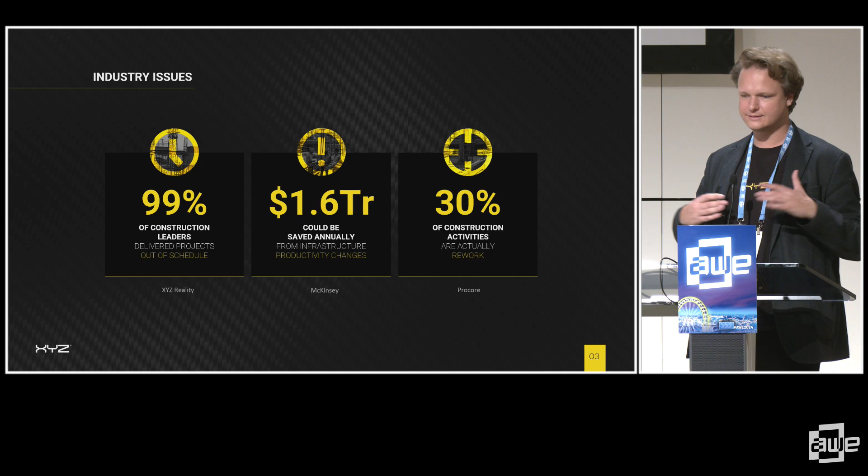All right, let's talk about construction. It's a multi-trillion-dollar industry with multi-trillion-dollar problems. Unfortunately, it's just an unfortunate fact of life that mistakes happen, and pretty much every project, from the airport that I flew here from to my grandmother's loft extension, inevitably runs into problems, goes over budget, and falls behind schedule. This is kind of just a law of nature, or so it was until today.

And why does this happen? Well, one of the main reasons is that 30% of the work that is done on a construction site is in fact rework—that's fixing mistakes that have been made. So 30% of all the activity is just fixing mistakes.

Our founder and CEO, David Mitchell, has been in construction his whole life, and he's seen a lot of these problems firsthand. In 2017, he founded XYZ after learning about AR technologies, and he realized that it could be the killer use case.

By law in Europe, all large-scale construction projects are designed according to BIM standards—that's building information modeling. What does this mean? It means you have to have a very detailed and high-accuracy model during the planning stage. However, when it comes to translating this out onto the building site, quite often the plan kind of goes out the window, and there are things people hadn't accounted for.

And so that is one of the biggest problems as far as we've identified. By showing people holograms of what they're building, positioned within construction tolerances, the industry could finally be able to build things right the first time and on time.

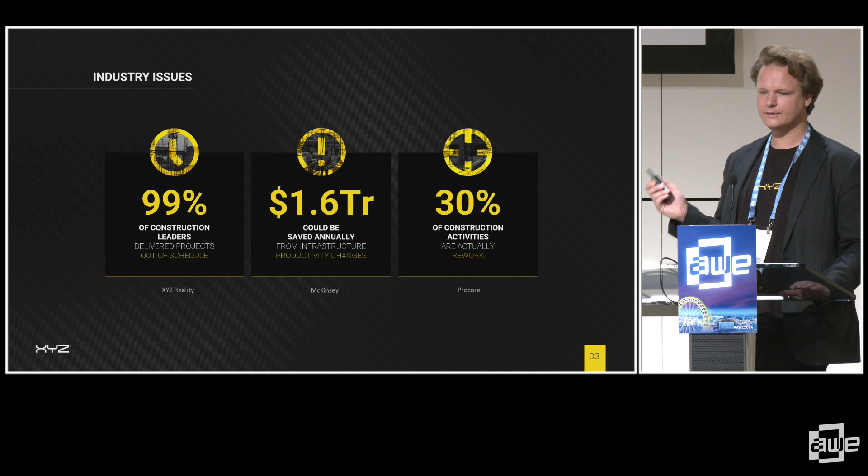So back in the early days of XYZ, we tested out all the existing solutions that were out there, and we found that they just weren't up to the job for what we wanted to do. Construction models can be really big—some of the data centers we've worked on are over 1 kilometer long. They've got hundreds of thousands of elements, hundreds of millions of polygons to be rendered. They're just huge. The existing products out there weren't even able to store this data on disk, let alone render it in real time.

And you might be asking, why don't we just use render streaming to stream it from somewhere else? Unfortunately, on a lot of construction sites, you don't have Wi-Fi, and you don't even have 5G if it's in a remote area. And if it's indoors, that rules out things like Starlink a lot of the time. So we had to design something that can run offline. The workflow being: you go in the office at the start of the day, you sync all the data for the day, you go to site, do your work, and it's all offline.

Then at the end of the day, you sync it back to the cloud again. So that's our workflow there, and we found that our devices weren't powerful enough. Also, they weren't accurate enough. You would find that if you walk around in a circle and come back to exactly where you started from, the system's tracking technology will have drifted a little bit. You have an accumulative drift that can build up over time with a lot of these tracking technologies. Construction typically permits a sub 10 millimeter tolerance for errors, and there was no device out there able to meet this standard.

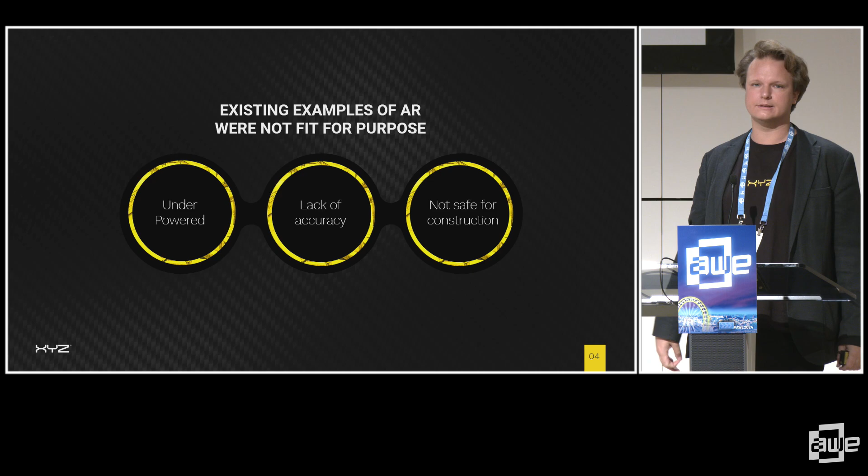And finally, there were really strict rules as to what you can bring onto a construction site. So if anything you're wearing on your face, you need to have unobstructed peripheral vision to be able to see any kind of threats and obstacles coming in from the sides. Anything that's covering your eyes has to have an optical clarity index test. So that rules out pass-through devices like the Vision Pro.

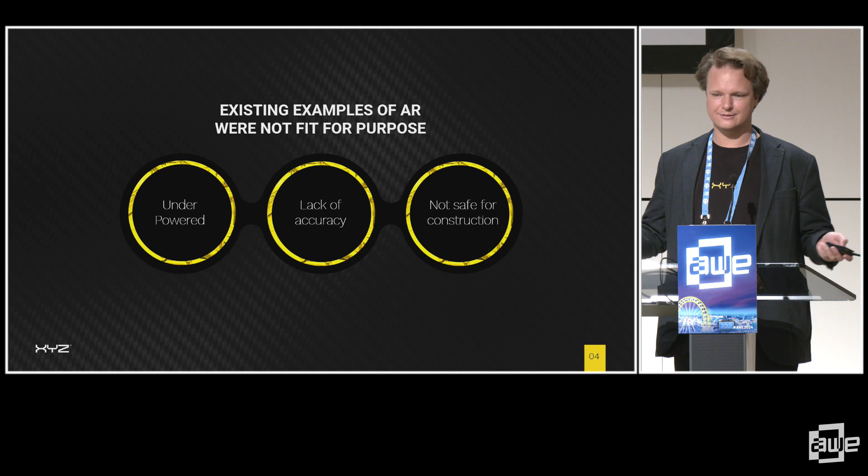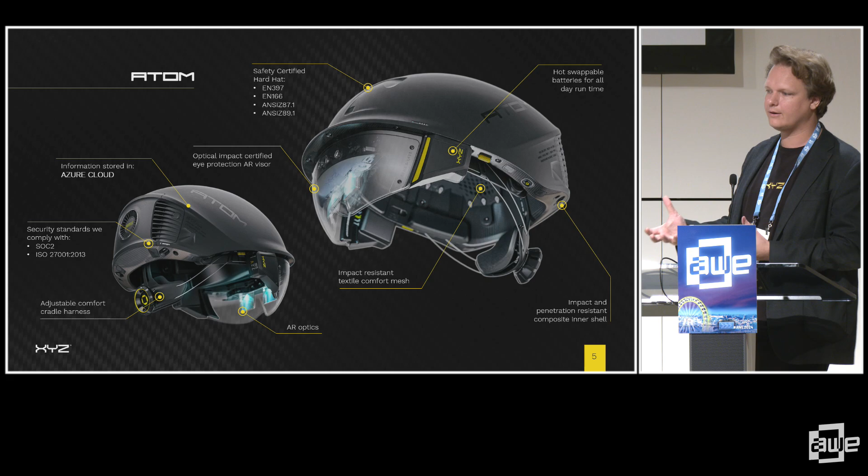There's a bunch of reasons why we had to do what I'm going to show you next. We realized that we were going to have to do it the hard way, and we built the Atom right here. So this is the only AR headset that's been purpose-built specifically for construction. It's a fully safety certified hard hat. It's got an Intel i7, 32 gigs of RAM, and a terabyte of SSD storage, so it's effectively like a reasonably powerful laptop that's all been reconstituted into the form factor of a hat.

It's also got hot swappable batteries so that you can have uninterrupted power throughout the day. And it's got a set of cameras on it. It's got some tracking cameras. It's got a laser tracking system. And it's also got an RGB camera so that you can capture composites of holograms and reality.

So it's not just the Atom. We've also built our own file format and exporters for various things like Revit and Navisworks. So once you've done your modeling, you can just drag and drop the model into our web platform, and we'll convert it into our .xyz format and sync it onto your device. This is a file format that's been designed to efficiently store and transmit BIM models and then be able to load them really efficiently into the GPU for real-time rendering.

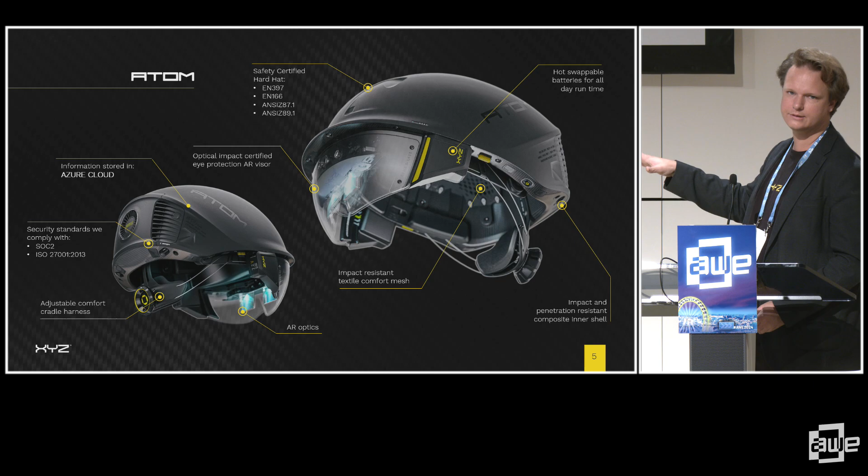It also comes with a controller. So why do we use a controller? I know that hand tracking is really in vogue at the moment. There's a couple of reasons. Often on a construction site, people are wearing gloves, and they can be really thick, and a lot of the hand tracking models that we looked at have not been fine-tuned for working with gloves. So that's a big problem.

Another one is that often on a site, people are going to be communicating to each other with hand gestures, and we don't want them to get misconstrued with people interacting with the technology. So we built this controller. It uses the same millimeter accurate tracking system as the hard hat, and it has a really fine steel tip on the end of it, so we can track the pointer tip down to millimeter accuracy.

And we can use that to sample points around the site, and this has a number of uses. We've got a tape measure tool, so you can measure from point to point. It's the only tape measure I've seen that can actually measure through solid objects because it's effectively measuring in air. And you can also use it to sample points around the site and align your models.

So what you're seeing the engineer doing in this image is he's using the controller to sample the position of a survey point. These survey points get put down by surveyors. They put thousands of them across a building site, typically. And each of these points represents a 3D coordinate relative to the site's coordinate system, relative to the models. So what you can do with the Atom and the controller, you can go around and tag any 3 points, and use that to align the models to the environment with really high accuracy. We offer some other methods as well.

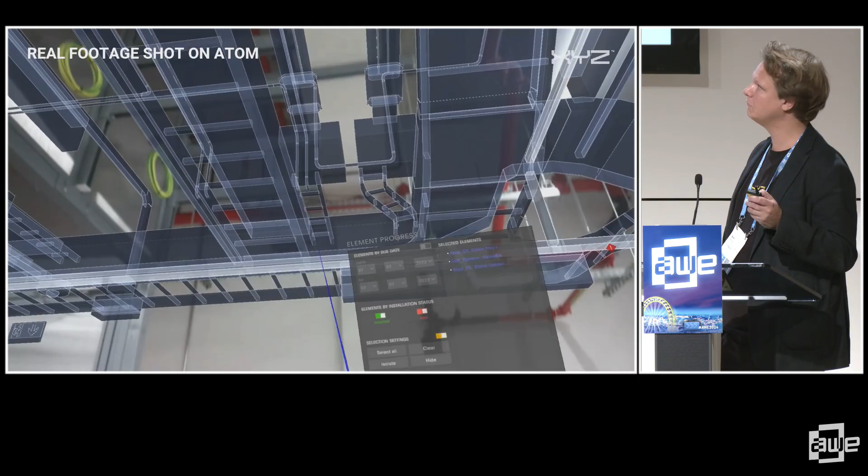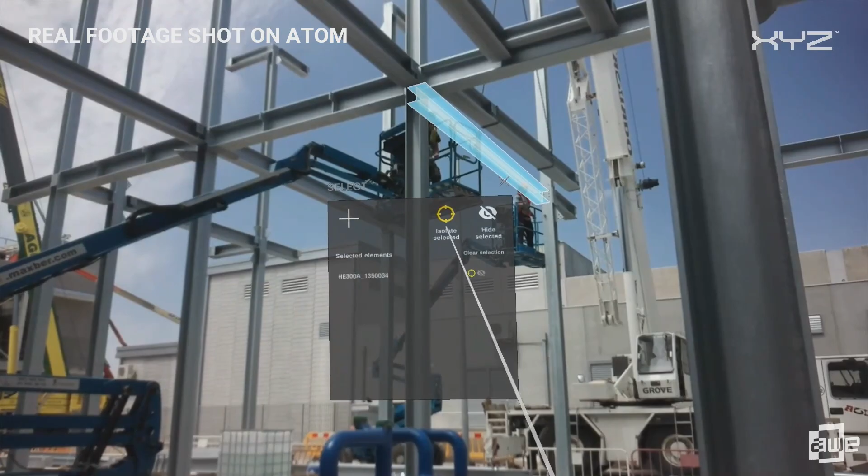Here is a quick 30-second compilation of the Atom in action on numerous mission-critical infrastructure sites around the world. The majority of our clients so far have been data centers, but we've also expanded out into pharmaceuticals and aerospace. And you can see that, as well as the see-through AR, we've also got the camera, which is able to capture videos like you're seeing here.

And in the final clip that's coming up after this, I like this one because it makes it super clear what the value proposition is right here. You can very, very easily see the difference between the hologram, the as-designed, and the reality, the as-built. It becomes immediately obvious when something has not been done correctly.

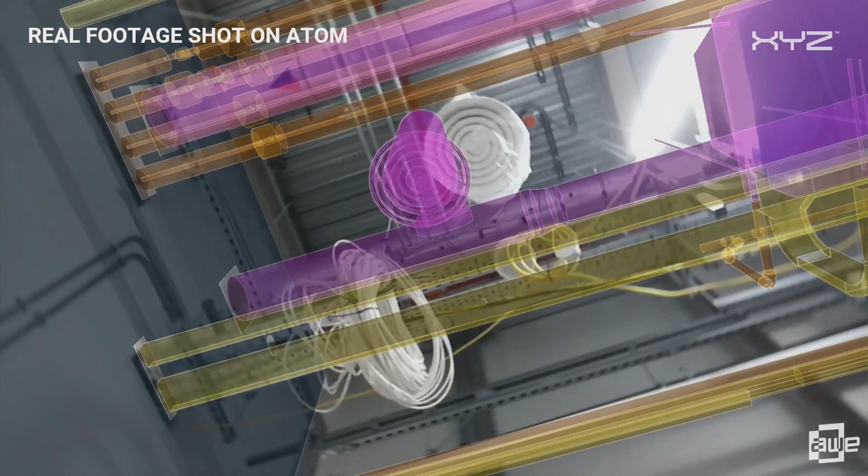Okay, so what did we just see there? The Atom accelerates your construction projects by providing real-time evidence and insight into three critical data realms. The first one is progress.

Up until recently, you'd have to rely on somebody's estimate that this part of the project is now 90% complete, when the reality is it might actually only be 20%. That's not a figure I've made up, that's a real scenario we've found out in the wild.

With the Atom, you can go around and say, I'm in this room, show me all the elements that should be installed by this particular day, and it will show them. You can say, hey, there's a hologram there but no real-world counterpart, so that part is late - you can tag it and it gets synced to the cloud. Similarly, you can say there's a hologram and the part that's been done on time. Really simple mechanic, but incredibly powerful, as you'll see in the next slide showing how it works in our platform.

We also offer quality data. Typically the workflow has been you complete the work, take a laser scan of the area, send it to a remote office, they align the scan over the models, then look for discrepancies like clashes. That workflow can take weeks, whereas with the Atom we're able to make these quality observations and get you that data in real time.

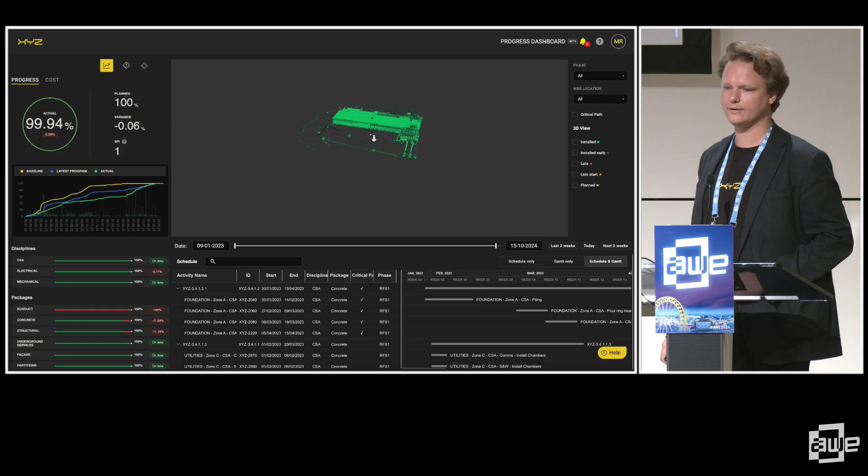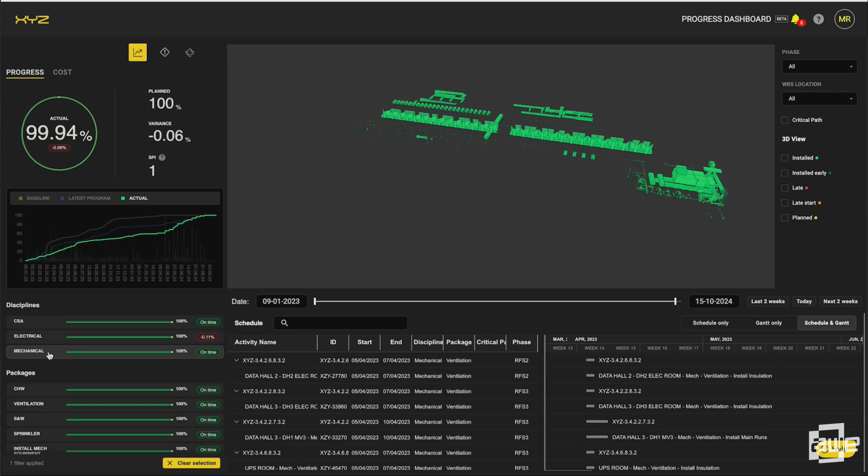Here we go. So this is a web platform. You go on the website and get a 4D BIM viewer, so you can view the entire site model over time. You can look at dashboards which show the predicted status of the project at a certain time versus the actual observed status over time, and often they're glaringly different to what people thought they'd be.

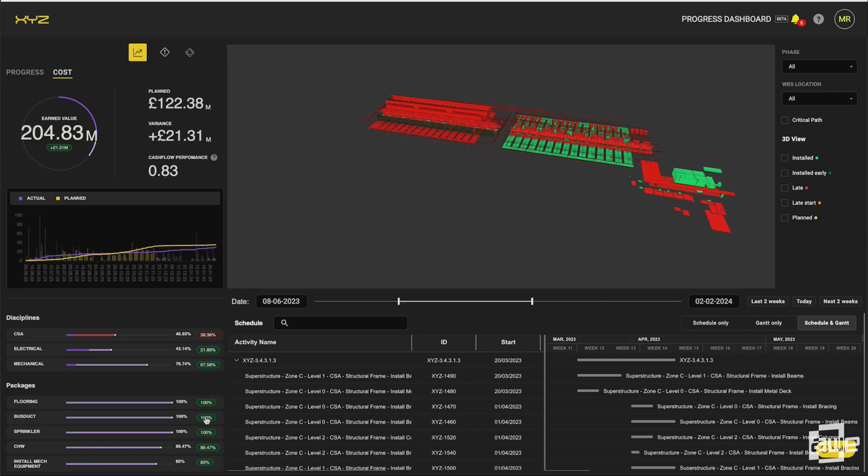You'll see in this next bit we color code everything. All the elements flagged as red are currently late, and all the ones verified as installed on time are shown in green. So it becomes really easy to see, okay, this bit of the project's behind schedule, this room is behind schedule, the electrical is behind schedule, or even everything one particular team worked on is going behind schedule. This allows the client, the asset owner, to take action and prevent these things from getting even worse.

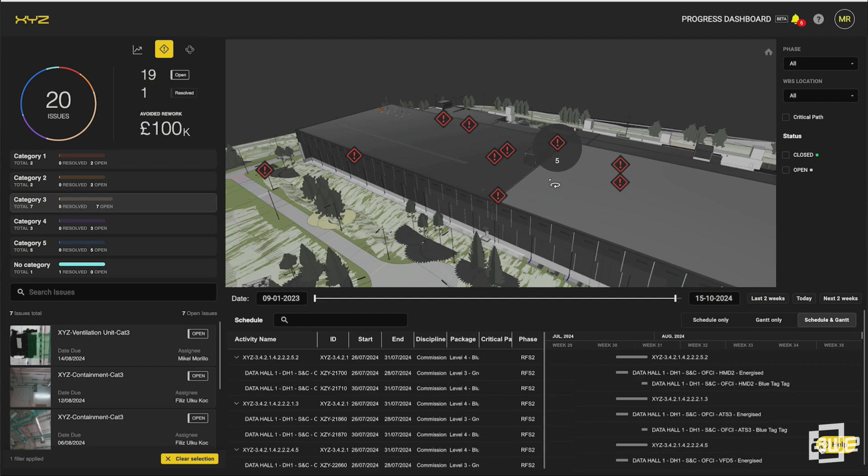This is an example of the issues dashboard. All the issues raised in the Atom, you're able to see in the context of the complete model. I can click on one and see all the evidence gathered using the Atom - pictures, videos, who it's been assigned to, what date action is due by, what recommended actions need to be taken.

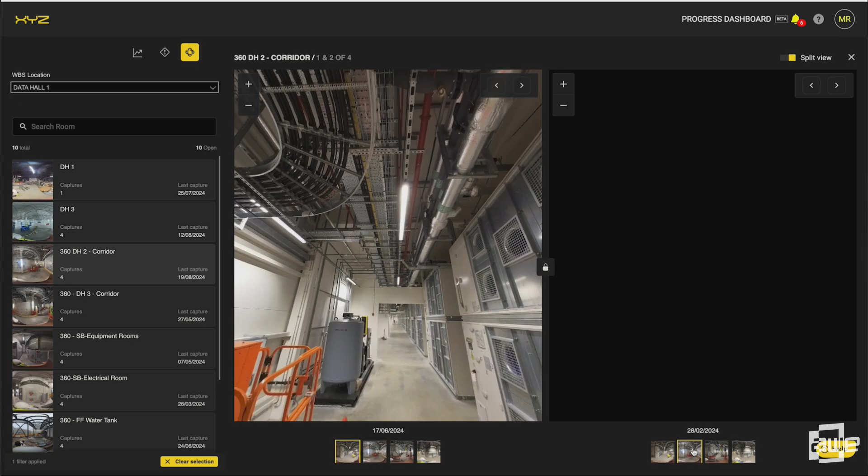This is a new feature I'm really excited to share with you today - 360 capture. An engineer can go around the site, go into a room, and snap a 360 to give you a really clear picture of how the site is right now. You can do them on different dates and view them side by side, getting an instant idea of exactly how the project is progressing over time.

All right, with that done, let's move on to some case studies.

Because we'd only just arrived on site, they'd done this without getting the Atom involved for the pre-pour inspection. But fortunately, we were able to come along and catch it before it was too late, and they were able to remedy that in the design.

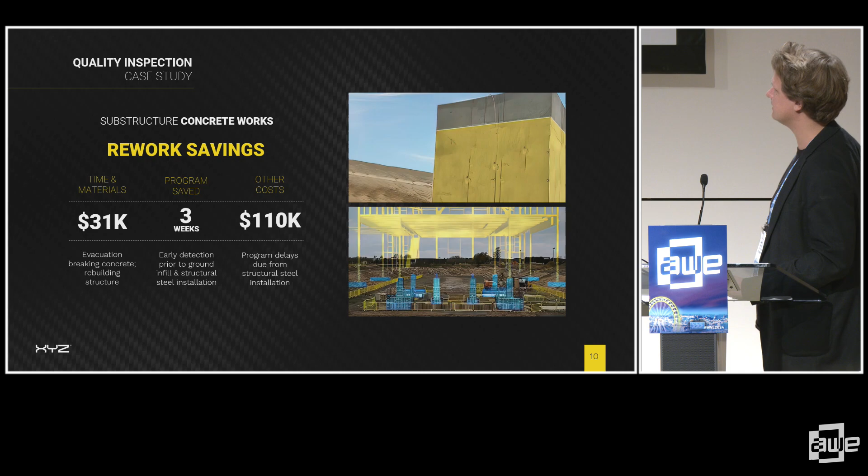That was an instant saving of $31,000 and 3 weeks to the program, and the knock-on effects of that add up to $110,000. So we proved ourselves in that first observation - just a single observation able to save all that money and time. Fortunately, after that they said, oh wow, this is valuable, and made sure we were getting involved in all the pre-inspections after that, which really helped bring the project back on track.

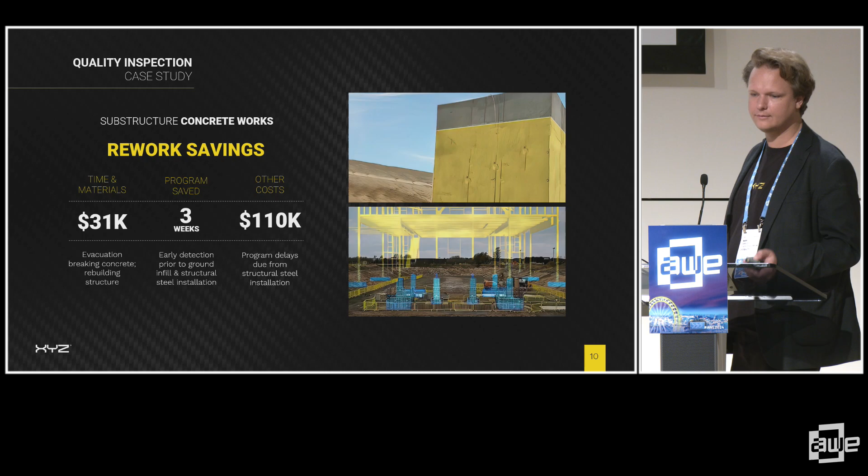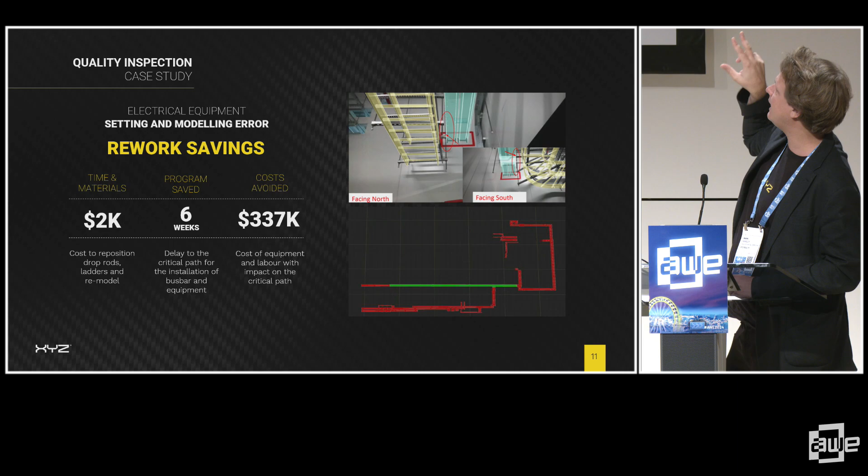What we found is that there were some steel rods coming down from the ceiling which were not in the model, you can see there's no hologram there. When we did an inspection of the area, we saw that one of the elements planned for installation was going to clash with these things that weren't accounted for in the modeling system. We flagged this up several weeks ahead of schedule, and the client was able to take action, procuring the additional design parts and working around the issue.

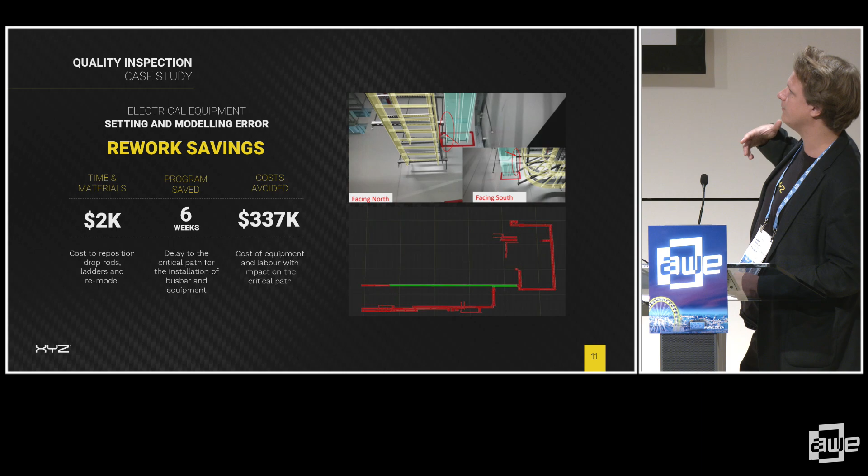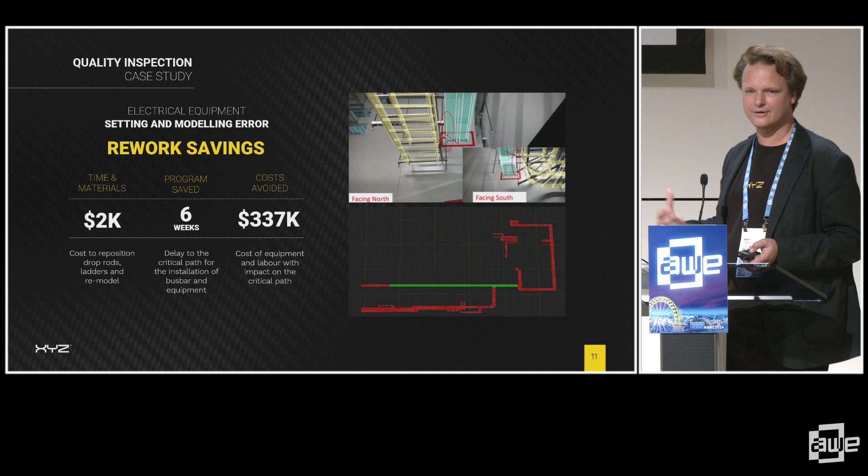This is the beauty of the Atom. We're able to spot these things and forecast issues long before they happen, allowing people to take corrective action ahead of time. If we weren't involved, the contractors would have come to site, begun installation, realized there's a clash, had to down tools, go to the office, and start a lot of arguments across the whole supply chain trying to figure out what went wrong. Instead, we stopped all these issues before they even happened.

In this third case study, this is about underground services. Any mistake you make with underground services typically gets buried under concrete and comes back to bite you later down the line. Concrete is also one of the world's worst offenders for carbon emissions, so if you pour a whole site and then have to break it all up and start again, that's really not good for a building's carbon footprint. If you can catch these things and prevent that, it's really wonderful.

What we can see here is that the manhole in the top image has not been installed correctly. This is just one instance, but there were actually 15 instances around the whole site where the manhole was misaligned by half a meter or more. So yeah, pretty serious problem.

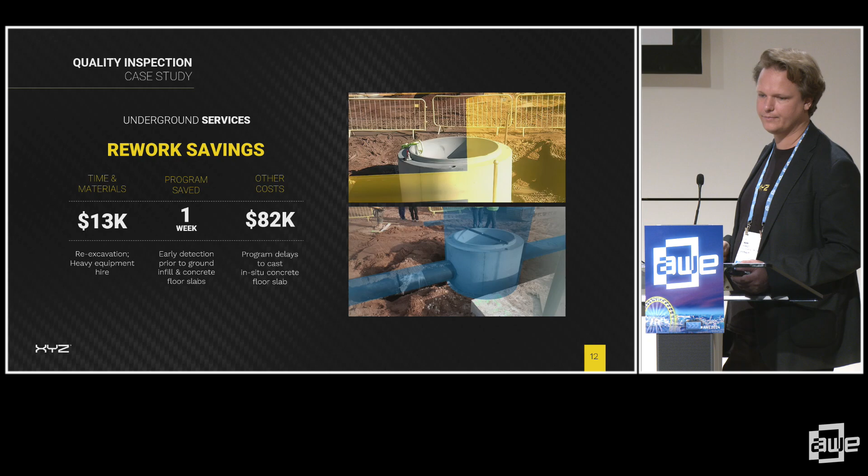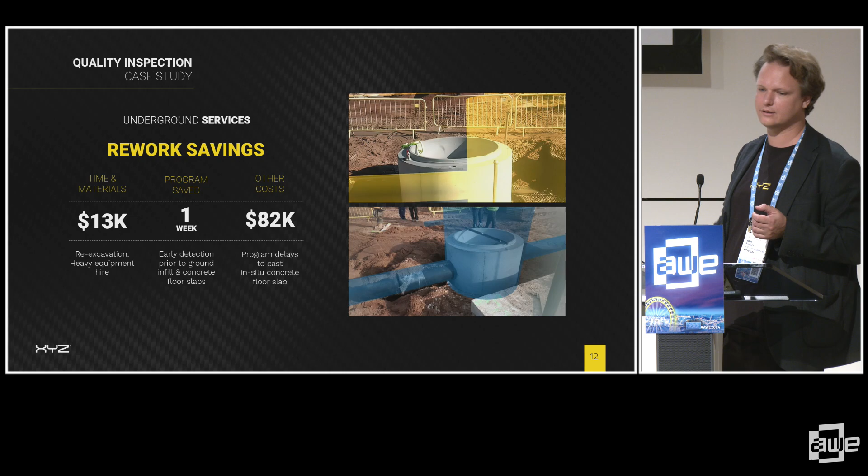It's even more serious because all the elements that go on top afterwards are precast, so the whole thing's supposed to fit together like a puzzle. If something goes wrong and it's all buried, you either have to smash it up and start again, or redesign and recast all the elements that connect on top. Fortunately, we caught that before the concrete was poured, and it was fixed.

After all that, you might notice, hey, we've put all the conduits in the wrong place. By that point it would have been really late. They would have had to break up all the flooring and concrete, start again, and all the dust that would create would have caused total havoc for a data center that needs to be immaculately clean on the inside. So huge win for the client there.

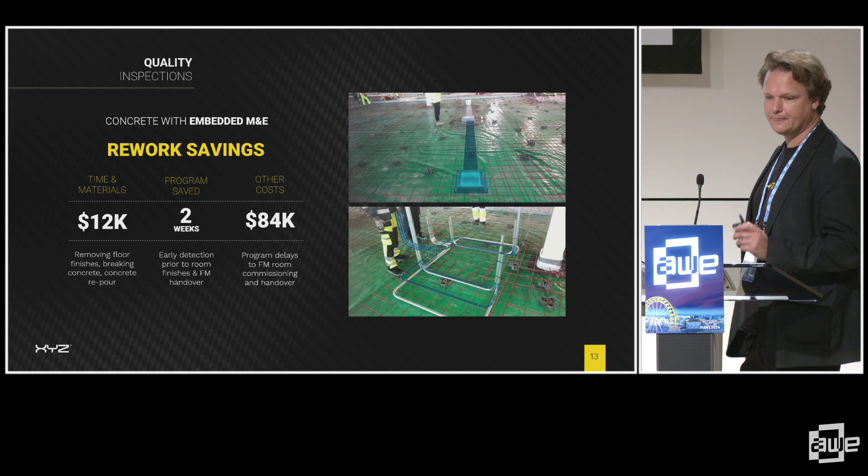I'm nearing the end, so I've got a few final stats to summarize. Over the years we've been working with our clients, we've managed to deliver them a 9 times return on investment for building data centers. One of our clients has been in the data center game for over 20 years, and they told us they used the Atom from start to finish on one of these projects, and said this is the first time in their whole history they've actually delivered a project on time.

If you remember back in one of the first slides, I told you rework accounts for about 30% of activities in a construction project. On the ones that have used the Atom, we've been able to get that down to under 1%. So yeah, really powerful. I think it's the killer use case for XR, and I hope after showing you this, some of you are going to agree with me.